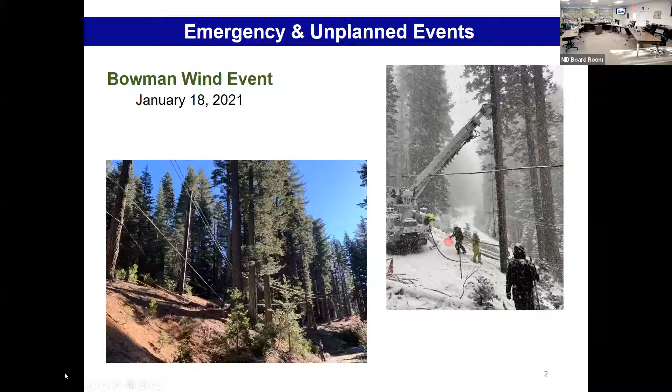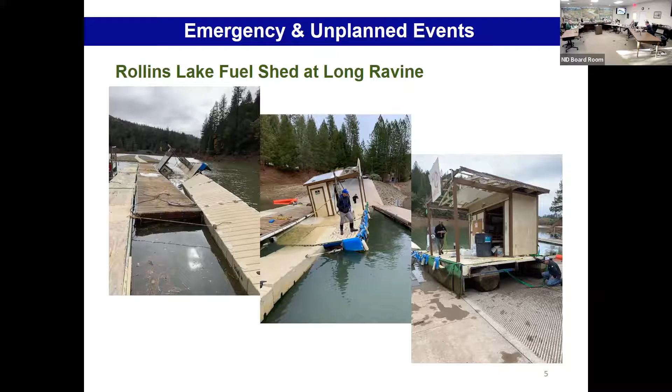The other issue we wanted to highlight, which you may have seen in the pipeline, is the aftermath of the bomb cyclone - which I still have a hard time wrapping my head around. We saw about 13 feet of rise in Rollins Reservoir. The fuel dock at Long Ravine had a problem, and the Recreation Department, Safety Department, and Hydro Department all worked together to get it onshore where repairs can be made in a timely fashion.

Moving on to the project highlights. The first one I wanted to highlight was the Combie South transformer replacement. This is the main transformer there, and it's been a bit of a problem for us. The test results have been bad for a while, and the insurance actually said they won't cover this - we need to get it taken care of. So this project was to replace the generator step-up transformer. We used an electrical consultant to specify it, the civil design was done by NID staff, and the testing, installation, and commissioning was all done by NID internal staff.

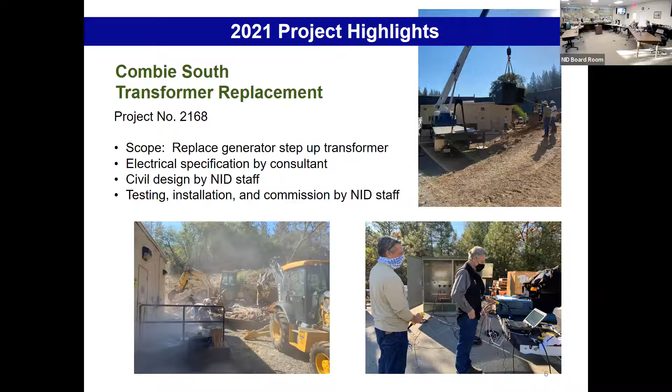The next project, in a similar vein, was a breaker replacement at Rollins Powerhouse. We replaced the existing 60,000 volt SF6 breaker with a vacuum circuit breaker. The big takeaway from this job is that SF6 is a significant greenhouse gas, so we've moved away from that and gone with vacuum breaker technology, which has no significant environmental impacts - essentially you break your arc in a vacuum instead of using a gas as an insulator. It's a significant environmental improvement. Again, we relied on an external electrical consultant for the design, NID staff did the civil design, and we did the testing, installation, and commissioning in-house.

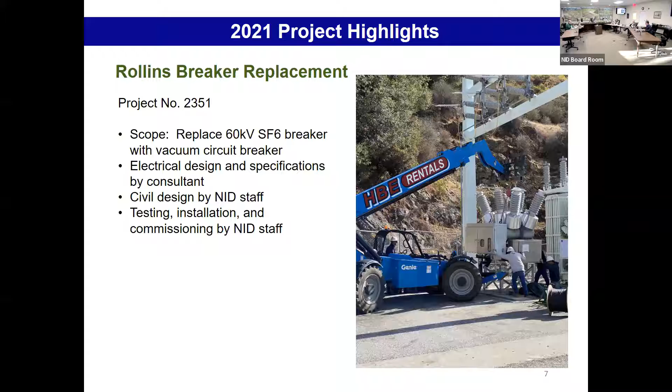Well, this is a breaker, just like a circuit breaker in our house, only large scale - except a whole lot bigger. You can see in that picture the gentleman in the hard hat standing right next to it, so it's probably 12 feet tall. It's quite a device, but it serves about the same purpose.

Just incredible maintenance issues trying to keep those free from debris, keep the water moving so the gauges were reading accurately. So we've replaced them with magnetic flow meters out there, and they're tremendously more accurate. What we found is that we don't have to run the cooling water pumps as often, which is a savings in terms of the parasitic load of the powerhouse. So we aren't pumping water to cool it down anymore now. We're just generating, and there's more electricity going to the grid. So it does overall improve the efficiency of the powerhouse with these types of upgrades.

Next project, and this is a really difficult picture to look at. We really struggled a little bit to find a picture that I could show that showed the inside of the powerhouse that didn't give away critical energy infrastructure information. So what you're looking at is kind of the side wall and the ceiling. The orange pipes there are the fire detection system. They're little PVC pipes that run to various places in the powerhouse and sniff for smoke.

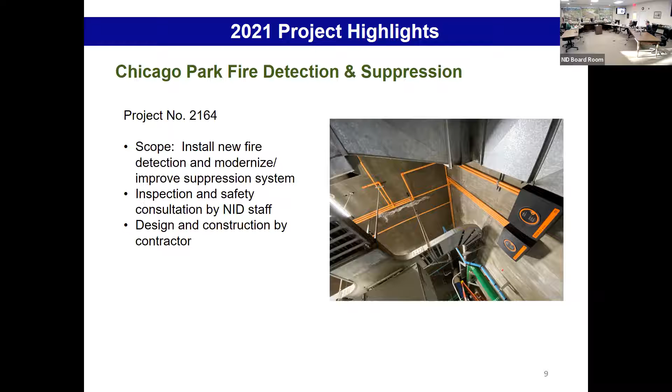And can then trip the powerhouse if there's a problem, so we detect it earlier. One of the things that we're trying to avoid here, and we've gone to great lengths to avoid, is the situation like the Thermalito Afterbay, the powerhouse there that caught fire and burned, and took many, many years to rehabilitate and put back online. It was a significant environmental problem.

Next job. Can I ask a question? Yeah. On these two projects that you have here, the last two that you've shown, are these examples where you do the work from start to finish within the hydro team?

So typically what we do is look at the skills that we have, use our staff as much as we can, and then farm out the pieces that we don't have the staff for. So we don't have an electrical engineer on staff, so if we need electrical engineering design, we'll go out and hire an electrical engineer to do that work. We don't have a mechanical engineer on staff, so we pick and choose from the mechanical engineers if we need mechanical design work. Generally, the civil engineers in the engineering department will do all of our civil design.

And then in terms of install, yeah, we generally do our install. The project here, this Texas Creek Slope Stabilization Project, is an example of a job that we did hire out to a contractor. It was too big for our crews to handle, but we find that it's more cost effective for our crews to work inside the powerhouse.

For cybersecurity reasons, if we have a contractor do it, we still have to babysit that contractor, so we have to have a body in that powerhouse anytime somebody is in there working, whether or not, or anytime a contractor is working. So we need to be more cost effective with staff inside the powerhouses. Okay, thank you.

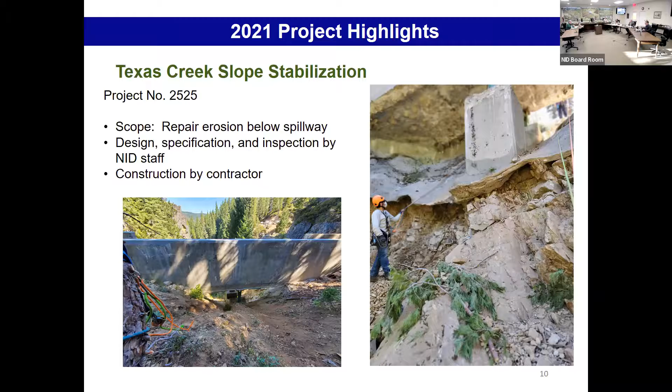We continued on our Bowman transmission line, 60 kV vegetation management. We've been really doing everything we can to hit this transmission line hard, and we're essentially treating it like the Golden Gate Bridge, where we'll go just back and forth to make sure that right of way is maintained as clear as we can keep it in the narrow window that we have.

Is this another example where hydro staff are performing the work versus the vegetation team that exists within the water area? So there's some of both that happens here, and some of this gets contracted out. Some of these areas are very difficult to access, and we find that the contractor costs are extremely high. So we bid out huge sections of this and broke it all out into individual pieces, got contractor bids in on it, and looked at it and said, no, we can do this cheaper in-house. We've looked at it, and then if the contractor can do it better, then we'll give it to the contractor.

In terms of the vegetation crew, they do all of the herbicide applications out there for us. So that work gets contracted out, and we use the resources in Grass Valley for that.

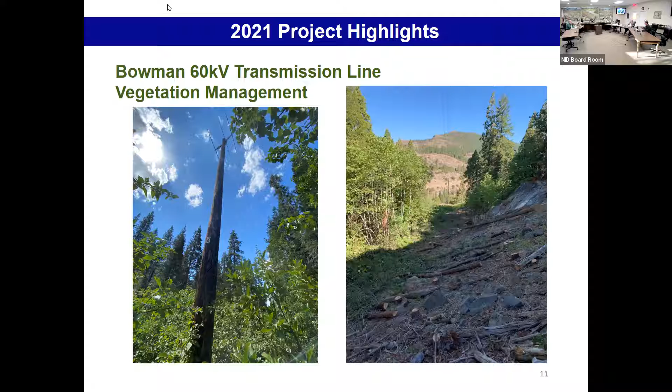The next project I wanted to hit on is the Bowman North Dam face repairs. This was, I guess, a benefit of the drought. Water levels were extremely low, so we had the ability to do some maintenance on sections of the dam.

These sections aren't normally visible above water. This worked with our safety department. You can see the little rig we lowered the gentleman on with, on the face of the dam, so he could do the work, and the safety folks helped us make sure we had all of that put together appropriately.

That concludes my project updates. I don't know if there's anything else you might be interested in. I'll run through what the other departments are doing, or the other groups on the hydro side, if that works.

Will you be touching on the technology implementation? I know last time we heard, you were in beta testing on it. And that's a perfect transition here. Okay, so, there we go.

On the admin side, that's one of the things we've been focusing on heavily, the computerized maintenance management system. We've fallen a little bit behind schedule. We're still looking at a first quarter 2022 implementation, given the recent cyber issues the district's had.

A retirement in the engineering group of one of the key GIS folks has also caused us to slow down a little, but we do expect to have this product functional in the first quarter of 2022.

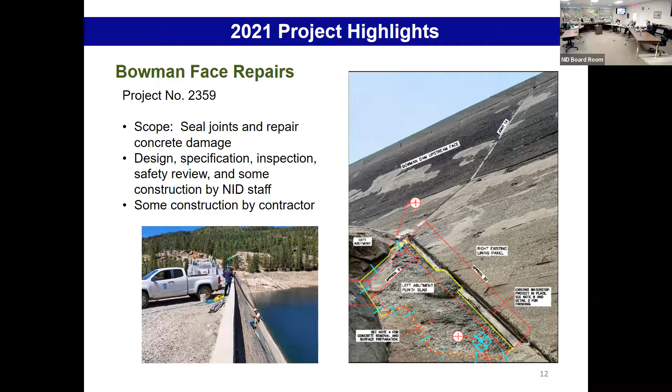When do you anticipate this particular project to be complete? On the Bowman? Yes. So the North Dam repairs, that's going to take us a couple of years of joint sealing and crack sealing. The big concrete work is done, but each joint we should probably go through, peel out all the old sealant, put new sealant in, and then patch other areas as necessary. It'll be an ongoing project over the next couple of years.

On the same subject, I'm confused—this North Dam is a rockfill dam. It has a concrete face? Correct, it's a concrete-faced rockfill dam. Oh, okay, didn't know that. Yep, most of it is just a big pile of rocks with concrete on top.

In terms of key activities, the board did approve the new power purchase agreement for the Combie South Powerhouse. The other thing we've been working through as part of our new insurance program—Zurich sent a specialist out, and they did a risk assessment and risk reduction study for the powerhouse facility. We've been working through the recommendations, and that's looking at more fire detection projects that'll come out of that over the next couple of years. That was one of the big things they were concerned with.

Moving along, as you may be aware, the board approved a contract for our 5-year Part 12D independent consultant review of the safety of dams. The inspections for that were completed in August, and then we sat down with a group from NID, the consultant, and representatives from FERC and the Division of Safety of Dams to talk through the safety of these dams. We expect the reports to be delivered early in 2022.

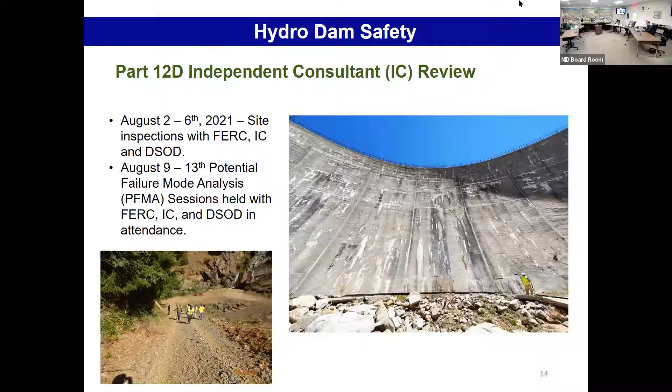We've also been working hard on the Scotts Flat spillway job. The board will get a report on this, I would assume, early 2022, with the selected alternative. You can see here the physical model that's been built for this facility, and one of the alternatives they're looking at to take care of the flows out of the dam here. We expect to deliver the report with preliminary design recommendations and costs early in 2022.

So the model's been constructed and they've done runs on it already? Yes. Did anyone go up and observe it? It hasn't been finalized yet—they've built the models, run the scenarios, and now they're fine-tuning it, and then we'll go up and take a look. I don't know that we'll physically go, depending on what COVID does and travel, but they've adapted and have a pretty good camera system where you can see different angles as the test is running. Both FERC and DSOD have seen it in the past and seem satisfied with it.

Are preliminary results favorable? Well, certainly we're going to find a solution to the problem—it'll probably be this solution here, a square-walled spillway. It essentially replaces the entirety of the lower spillway. Okay, is that what it's looking like? It's going to be the selected alternative with this rectangular-shaped channel.

This is just the lower portion—the little hatches aren't the top of the dam, that's the bottom of the current spillway, right? At the very top of the picture there are three blue lines stacked up; that's the top of the existing spillway. It drops into the plunge pool, and there's a second weir right there, which is the old spillway from the original dam. We're talking about replacing everything down from that weir.

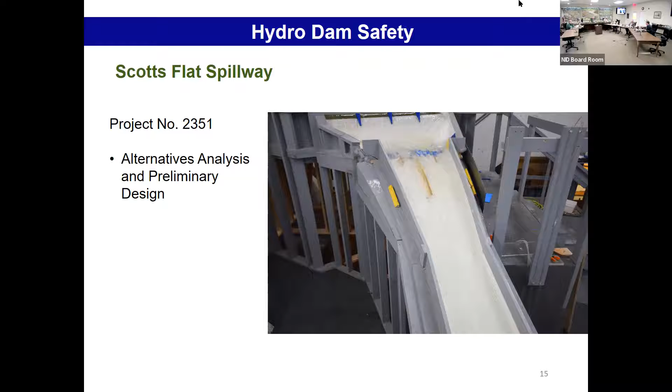The next thing we've been heavily focused on is corrosion assessment and control. We started our facility assessment with our tunnels, which hadn't been inspected in a number of years. We walked through all the tunnels, did a condition assessment, and found them in pretty good shape. We've now moved on to the steel penstocks and steel pipelines and are doing the condition assessment of these, so we can develop our capital improvement plan. Much more to come on this one.

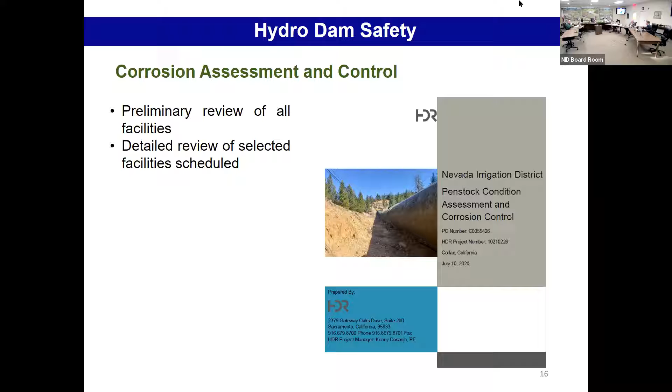We're very early on. We had hoped to do an internal inspection of the Combie South penstock in October, but the weather didn't cooperate, and that's when we got the storm, so there was no way we could take it down to do that inspection safely. We had to punt that until 2022, but we'll get to it then.

The Dam Safety Group has also been busy with the stability reevaluation of the Bowman South Arch site. This is one of the things the previous independent consultant said they wanted us to take a careful look at. The good news is it was found stable, but the consultant did have some recommended improvements to the rock mass near the thrust block.

On the hydro operations side, this is some of the reality of what the crews are dealing with. At the Combie South Powerhouse, the chart in the lower right shows an overview of energy prices at the node the powerhouse generates into. You can see prices go up at the end of the day and are low during the middle of the day. This is a reasonably recent chart, from October I think.

In the spring, energy prices actually go to near zero or even negative in some cases, then come up to around $100 an hour in the afternoon. So the operations group is tasked with ensuring we're generating during the hours that get us the most revenue, optimizing revenue with the water we have available. That's what that group has been doing a lot of recently.

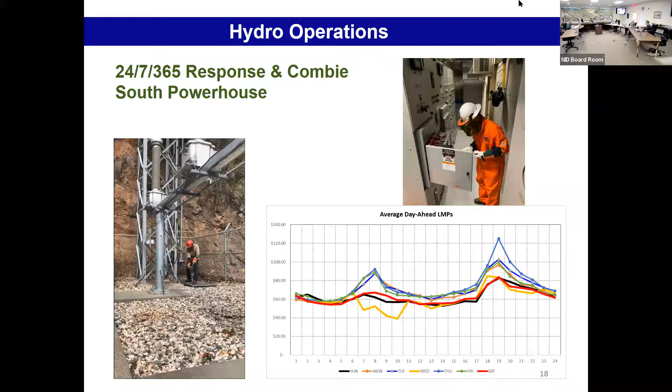What Director Peters is referring to is the CalISO market, where prices come up during the day and then drop dramatically when solar comes online, and when solar drops offline, pricing in the market goes up significantly. It's really changed the nature of the CalISO market, and that's what we're responding to and trying to optimize or maximize our revenue with.

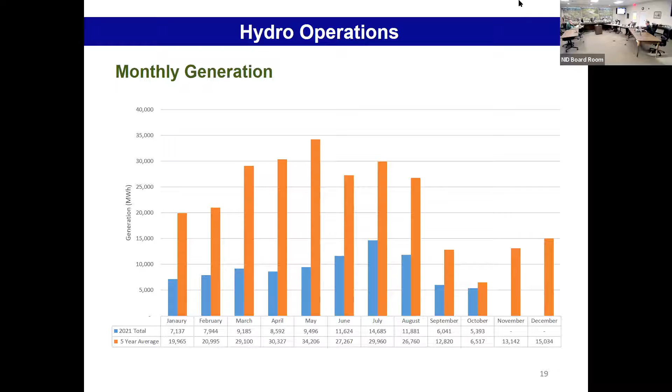I wanted to show a couple of metrics to give you an idea of how rough a year it's been from a water standpoint. This is our 5-year average generation versus our 2021 generation, and you can see the drought has impacted us dramatically across the board. The good news is that in 2011-2012, when the board negotiated the power purchase agreement for the Yuba Bear powerhouses, it was based on availability, and our availability has been fantastic this year.

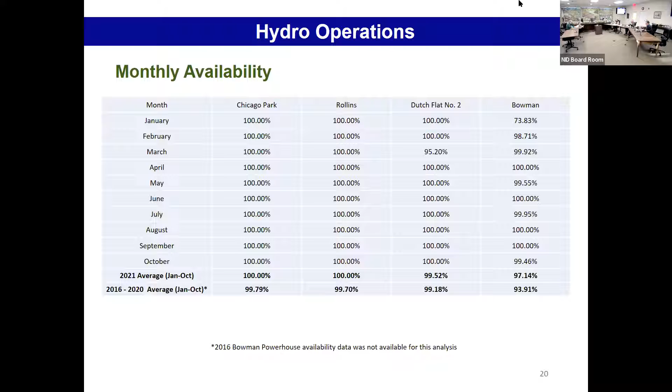So I think it's really been a fantastic year on the hydro side of the house, and that even includes that Bowman wind event in January, where you can see we had an availability that wasn't particularly good.

The next slide shows the powerhouses where the flows actually matter and the comparisons there. You can see that at Combie North and Scotts Flat, in general, our summer generation numbers were pretty good when compared to the average, and that's largely because they're driven by demand. So you can see that we did all right.

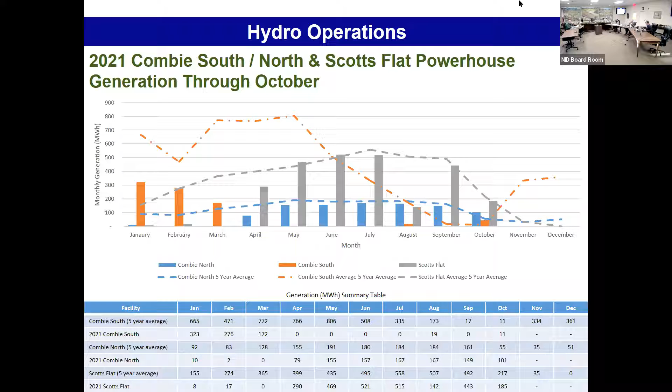Combie South is, of course, the outlier here, and Combie South being run of the river. It's just been an awful year out there. The good news is that we did have a good October with that storm that came through, and then November has ticked back up again. So hopefully we'll get some rain out of these next couple of weeks, and we'll begin to start generating there. But it's certainly been a rough year there.

Highlighting some of the maintenance side of the house and the work that they do. I've grabbed a couple of snapshots to try and give you an idea of the variety of the group work that the crews tackle out there.

The Quartz Peak Repeater project is critical to our dam safety team. Essentially what it does is takes data and repeats it to a place that we can get the elevation and flow data a whole lot easier. The tower there has been short for quite some time. In a big snow year, it gets snowed over. We'll have to fly out there and shovel out the solar panels and shovel out the antennas.

The transmission line pole replacement you're seeing there is just a routine replacement. During our inspections, we found a pole that needed to come out, and so our crews went out there and worked with a specialty line contractor to deal with that one, but we did all of the preparation work for it. Moving to the inside, you can see that this is just pictures of the routine inspections that we do inside the pipes and penstocks.

This is the turbine shutoff valve at the Dutch Flat number 2 powerhouse. We are experiencing some increased leakage there, and so I expect that the full refurbishment of that valve will show up on the capital improvement plan in the coming years.

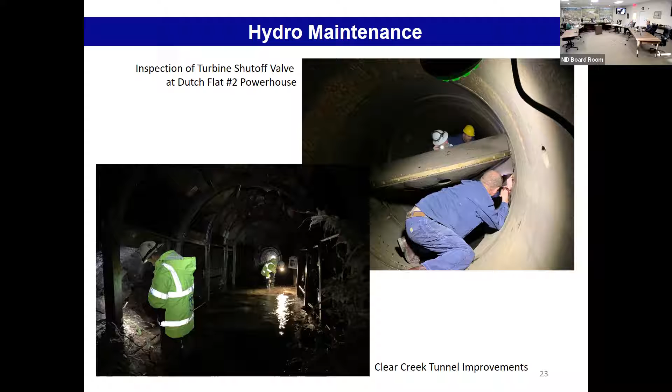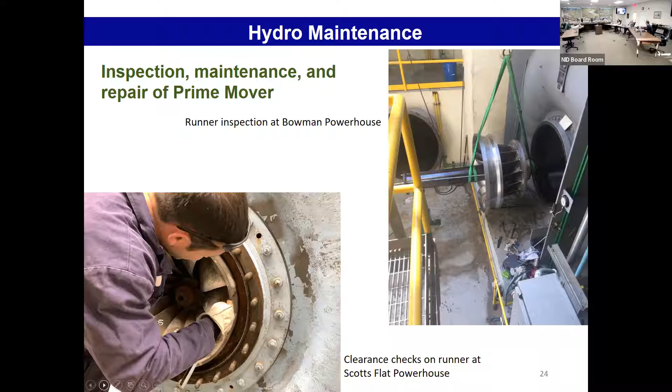This last picture here is just some maintenance on the runners. I talk a lot about runners, and nobody has a good idea of what they are necessarily. You can see the little runner, which is the circular piece at Scott's Flat. That runner, we actually had to pull it and then took it down to have it refurbished. It's a funky material, it's bronze, and it's an odd bronze compound that we can't weld on, so it has to be shop welded. The one on the right there is the runner out of the Bowman powerhouse, and that work's needed there too. We'll typically pull that one out and we can weld on it and refinish it ourselves generally.

On the compliance team, I just kind of wanted to highlight a few of the agencies that we deal with on a regular basis, and some of the work that group's doing.

The quagga zebra mussel measurement is something we partner with the recreation group to go out and do, to determine whether or not we have those mussels.

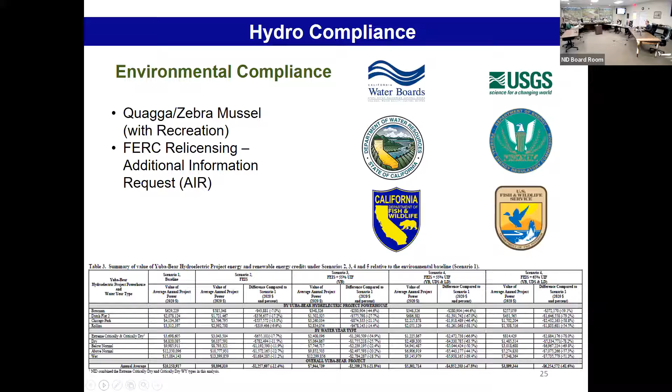And then on the FERC relicensing front, we have the additional information request, the AIR. You may have received notification that we filed a document with FERC this afternoon that responded to another round of questions about impacts of the project. So there's a lot of really good work that has gone into that over the last month or two to pull that together for FERC. So keep an eye out for that.

We also deal with a lot of NERC alerts, which is more fun to say than it is to do. Lately they've all been dealing with cold weather. NERC is very interested in not having a repeat of what happened out in Texas last year, so they're very focused on cold weather impacts to generation. We're not particularly worried about it, we're fairly used to dealing with temperatures like that. And then, of course, just the regular maintenance and reporting.

The hydro compliance group is kind of the other duties as assigned, all-of-the-above sort of group. If something comes in and needs to get dealt with, it's those folks that deal with it. That's everything from hazardous material disposal to emergency action plans to FCC licensing, and any of the myriad of things we deal with on that side of the house.

Looking ahead to 2022, the South Yuba Canal and Deer Creek Powerhouse - we'll talk about that briefly in the next two slides, so I'm going to skip it for now.

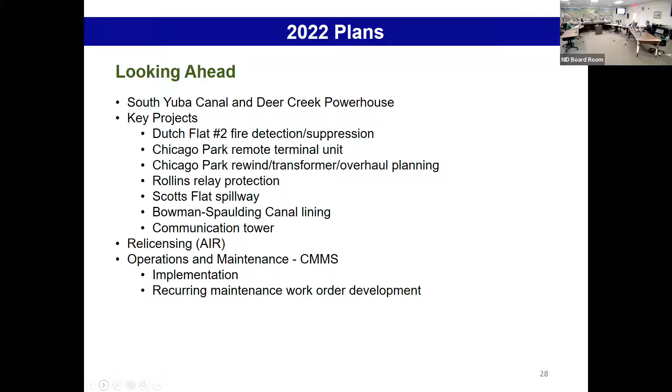And now, Deer Creek. First of all, I wanted to give a quick high-level review of the Deer Creek and South Yuba Canal purchase. On November 14th, the board approved the purchase of the Deer Creek development, which is portions of the South Yuba Canal. You also approved purchase of a bunch of lands, tangible personal property - all of the gauging stations, the alarms, anything that's inside the powerhouse. There are some water rights, the pending FERC license, the easements encumbering any land that PG&E is going to retain, and that approval also approves the lease agreement.

On April 28th of this year, the board adopted Resolution 2112, which reaffirmed your commitment to this acquisition. At that time we didn't know when it was going to happen, but on November 18th, it happened - FERC issued the order approving the partial transfer of the license, and that's a lot of words to say essentially everything that PG&E and NID asked for were approved.

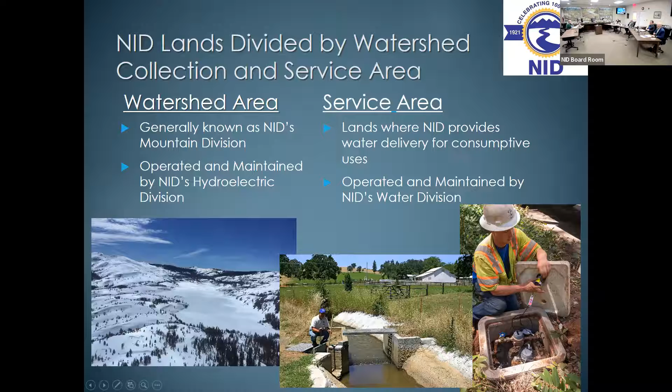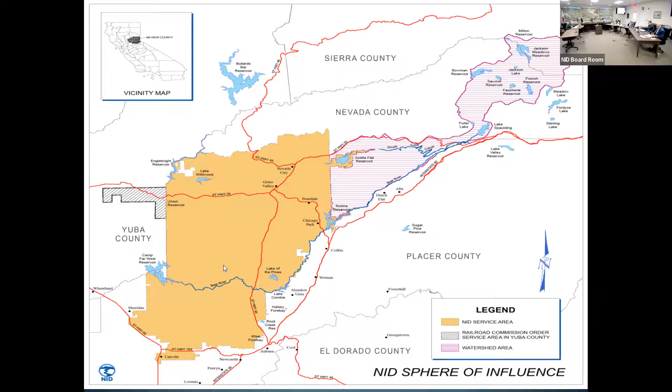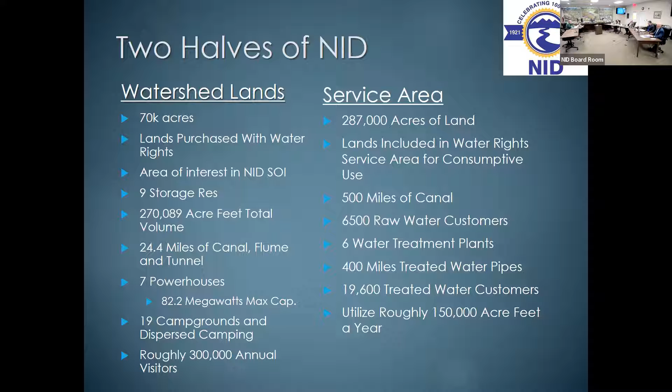For those who participated last time, we started at the headwaters of the Middle Yuba River system at English Meadows. We discussed that it was rather odd that NID is there because there's no reservoir. But back in the late 1800s, there was a reservoir there, English Reservoir, that was destroyed. When NID came along in 1921, although there was no reservoir, there were still water rights and land available there. NID purchased both, and we continue to utilize the land, turning the area into English Meadows, and we are actively working on restoration of that meadow for environmental and water quality purposes.

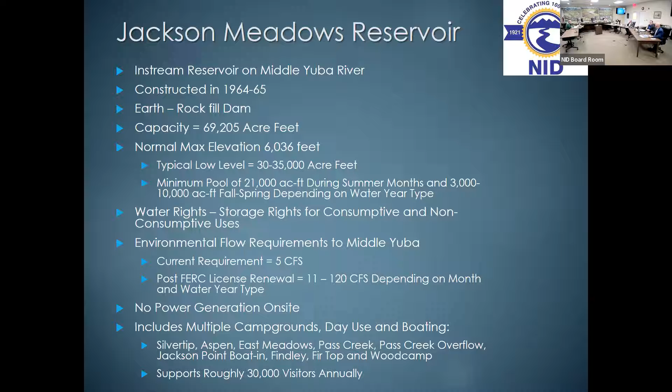We talked a little about in-stream flow requirements out of this facility, but this is a good time to discuss the different types of in-stream flow that NID is required to do through current regulation and coming future regulation. This particular facility has an in-stream flow requirement to pass water into the Middle Yuba River at all times of 5 CFS. Generally speaking, there are two different types of in-stream flow releases. This one is a release where we get to reutilize these flows.

Basically, we're going to put that 5 CFS back into the Middle Yuba River, and then we'll recapture it at the next reservoir down below, which is the Milton Diversion Facility. There are other locations we'll discuss where we have an in-stream flow requirement that we put in the creek, but it's non-recoverable to NID. In other words, it goes outside our district and we can't recapture those flows. We'll discuss those as we come across them.

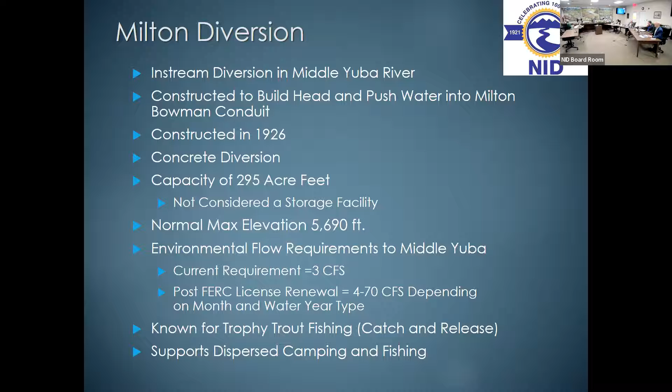So in that instance, is all of the water either going into the Milton Bowman Conduit or that FERC release, or is there additional water that may go into the river with the FERC water or environmental water? I apologize if I don't use the correct terminology, but I'm wondering - is it all going into the Milton Bowman Conduit minus the FERC flow, or is there additional typical water? I'm sure it varies. It's a little bit of all of that, you're right.

I imagine that scenario exists in a lot of the facilities - you have the overflow during the high water season, and then you've got the mandatory releases controlled for the rest of the year. Yes. Okay.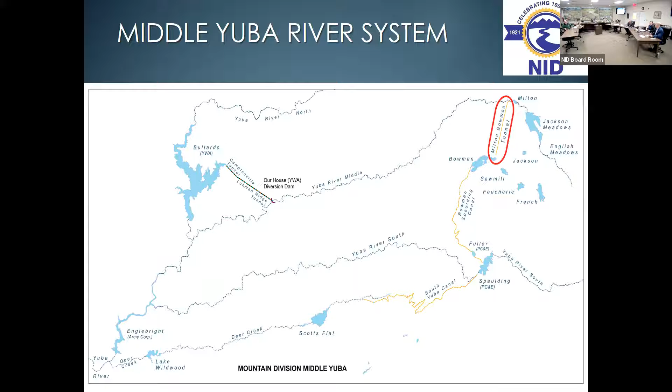One other thing I'd like to add is that wherever we have a diversion point that pulls water from a natural waterway, we're required by the state to measure those flows and report them. We won't go into great detail here, but future workshops will describe how we measure these flows, how we transport that data, and how we communicate it back to the state. Essentially, wherever we divert from a natural waterway, we are required to measure these flows at all times.

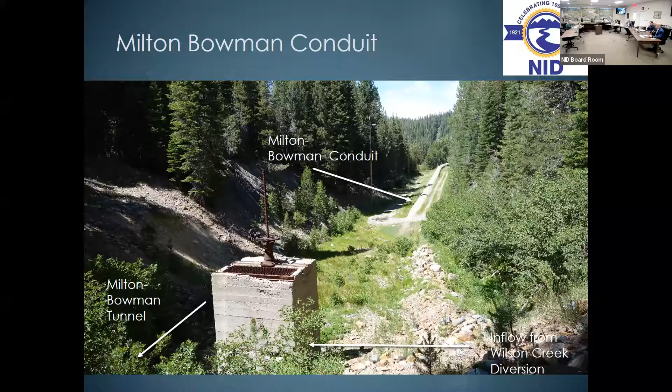In this picture you can see the pipeline coming down the hill. Moving to the bottom left side, it disappears into the tunnel. On the bottom right, you can see inflows from Wilson Creek. We have a natural diversion of Wilson Creek where we have the water rights to capture those flows and put them into this conduit, sending them to Bowman. As mentioned, these flows are subject to curtailment, so we turn that on and off as needed.

Do we divert the entire creek? Yes, we'll move into Wilson Creek in the next section. Here's a picture of the Wilson Creek diversion. It's pretty low tech. Currently we're working on a more permanent and robust facility that allows better control. Under the current FERC license there's no in-stream flow requirement, but after the new FERC license, we'll be required to provide 0.25 CFS or the natural flow in the creek, whichever is less.

I included pictures of this typical gauging station where we measure flows within the creek. You can see that little building on the right-hand side. There's no power out here, and it's very remote—in the wintertime we usually can't even get here. So we rely heavily on solar power, batteries, and technology to give us this information in real time. It can become a challenge, but that's one of the ways we navigate it.

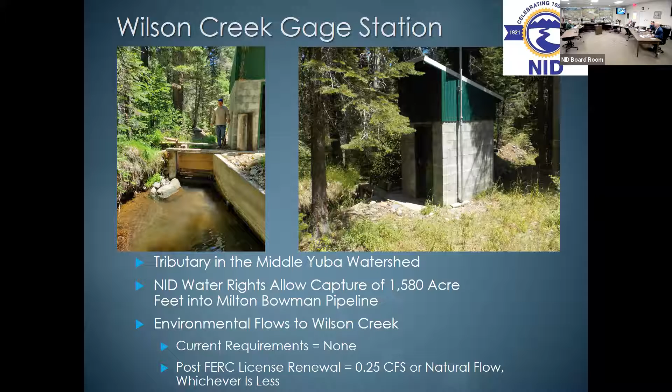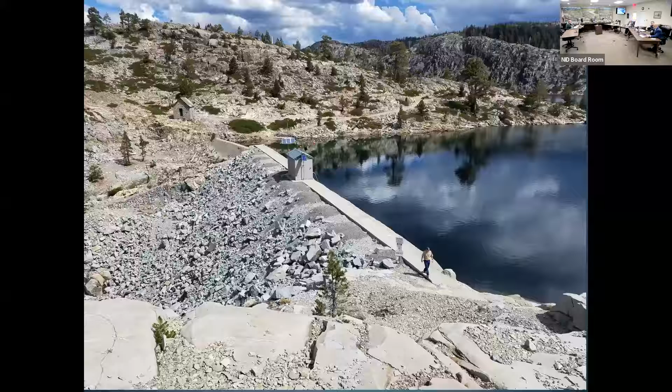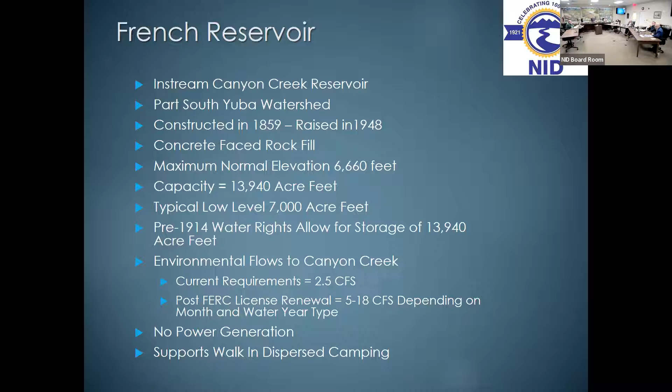French Reservoir is an in-stream Canyon Creek reservoir, meaning the dam itself is built within the creek and backs up water within the channel. It's part of the South Yuba watershed, constructed in 1859 and raised in 1948. It is concrete-faced rock fill, with a maximum normal elevation of 6,660 feet and a capacity of 13,940 acre feet. The typical low elevation is around 7,000 acre feet, so we utilize about half its capacity every year. We have pre-1914 water rights allowing maximum storage at the facility, and its current in-stream flow requirement is 2.5 CFS. Post-FERC license, that changes to between 5 and 18 CFS, depending on water year type or time of year. There's no power generation at this facility.

It is very remote, but it does support some recreational use. People either have very robust four-wheel drives to get in there, or they hike in and camp—actually, it's hike in only. In the picture of the facility, on top of the dam, you can see one of our reporting stations, again using solar panels, cellular signals, and radio towers. It's how we get information in and out, since it's very remote.

From there, we put flows down into Canyon Creek, and they flow into Faucherie.

Another pretty location. This is an in-stream Canyon Creek Reservoir, part of the South Yuba watershed, constructed in 1872 and then rebuilt in 1964 and 65. It's an earth core rock fill facility.

Maximum normal elevation is 6,123 feet. It has a capacity of 3,980 acre feet. Typical low elevation is 2,200 acre feet. We do have pre-1914 rights for storage of up to 2,600 acre feet.

The balance of the storage is available in post-1914 rights. Current flow requirements are 2.5 CFS into Canyon Creek. Post-FERC requirements are 5 to 18 CFS, and those flows are recoverable at the next downstream reservoir, which will be Sawmill. This facility supports camping, day use, and boating, with roughly 7,000 visitors annually.

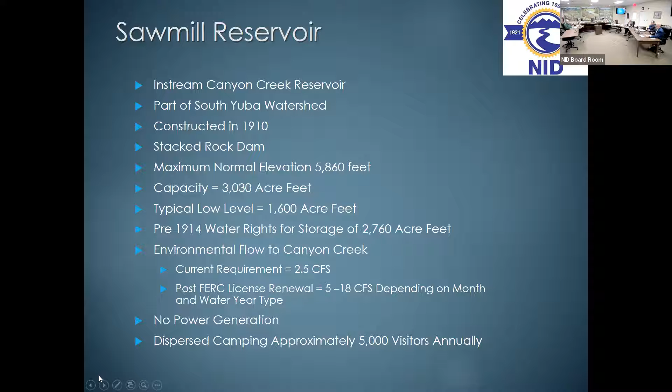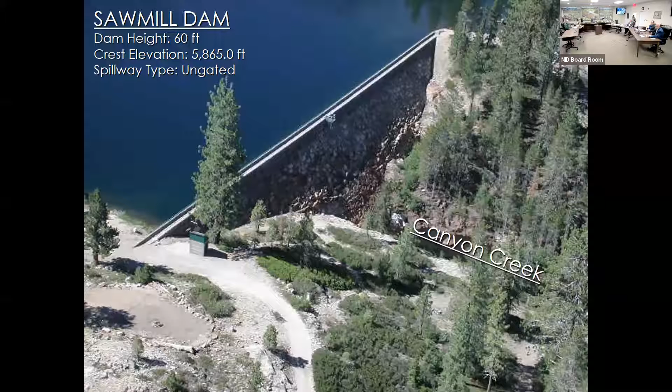That completes the supply from Canyon Creek, and we're going to move up into Jackson Creek, a fairly small watershed. At the head of that watershed is the Jackson Reservoir.

It's a fairly small reservoir, an in-stream reservoir, part of the Jackson Creek watershed, constructed in 1941 and 42. It is an earthen dam at an elevation of 6,592 feet, with a capacity of 1,330 acre feet. Typical low elevation is 900 acre feet, and we have water rights for 1,330, essentially the full allotment for storage.

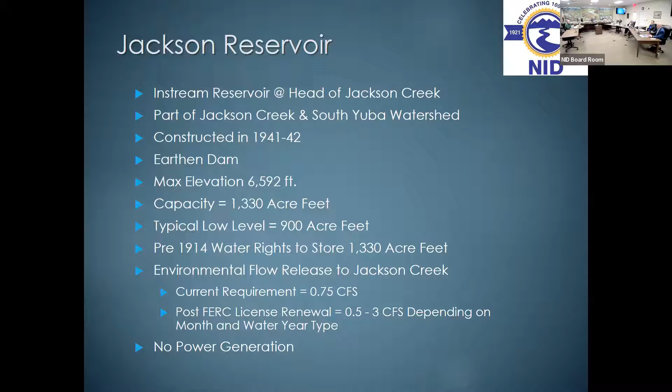We have an environmental in-stream flow release of 0.75 CFS, which will change after the FERC license to 0.5 to 3 CFS, depending on month and water year type. Again, this is one facility where those in-stream flows go back into Jackson Creek and eventually make their way into Bowman Reservoir.

Chip, I have a question. So you've been presenting how the environmental flow requirements are identified by body of water. Are those flows cumulative as one reservoir feeds into another? Say there's 2 CFS required, and 2 and 2, and then there's 10 CFS required at the next reservoir—is that 10 plus 6? No, it's not cumulative. For example, let's walk through Canyon Creek here if I can.

Which then flows into Bowman. Bowman actually has an in-stream flow release requirement into Canyon Creek that is non-recoverable to the district, and that's going to be 6 to 40 CFS in the future. So you can see it kind of matches as you go down Canyon Creek, but once you get to the end of that facility, you have Bowman dumping out into Canyon Creek at the lower reaches between 4 to 60 CFS, and that volume is lost to the district.

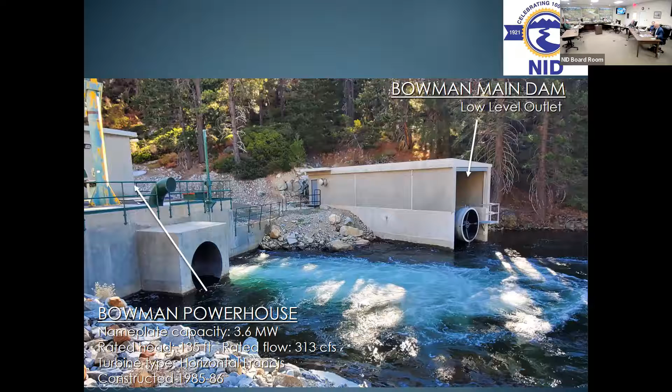Here's a picture of the outlet of the Bowman Powerhouse on the left. On the right is the low-level outlet for the Bowman facility, the Bowman Dam.

As I mentioned earlier, there's an after bay right below the powerhouse where we back water up again, and the specific purpose for that is to push water into the Bowman Spaulding Canal. This is a nice long facility, so I just highlighted it in yellow for you. Essentially, its main purpose is to transfer Bowman water down into Lake Spaulding.

This facility is located within the South Yuba watershed. And again, before I get too far, here is a picture of that facility, at the bottom of your screen. You can see the Bowman Powerhouse, and you can see the after bay where we're backing water up. And then off to the left-hand side here, that's where the canal takes off. That's also where we do our regulation and flow control, and where we dump water back into Canyon Creek for in-stream flow.

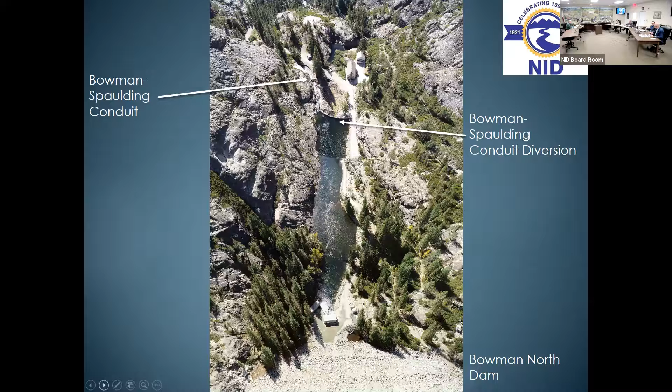The facility itself was constructed in 1926 and expanded in 1964-65, in coordination with the Yuba Bear Hydro project's increased capacities. It involves 7.7 miles of canal and flume and 3.1 miles of tunnel, and can convey 300 to 325 CFS depending on the location within the facility. We typically hit pretty close to that, nearly 290 CFS, so we're nearly at max capacity of this facility.

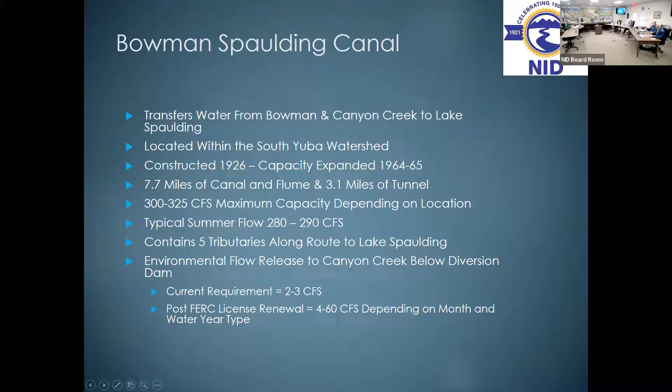The other unique thing about the Bowman-Spaulding Canal is it crosses over 5 different tributaries that cross into or under or over the canal, and we have water rights along those tributaries. We also have an in-stream flow release requirement at this diversion facility that flows water into Canyon Creek. It's currently 2 to 3 CFS, and in the future it will be 4 to 60 CFS. There's the diversion facility itself.

Following that yellow line down, the first tributary you run into is Texas Creek. The unique thing about this, I circled it all in red, but essentially the headwaters of Texas Creek have a number of lakes: Rock Lake, Bullpen Lake, and Lindsey Lake. You can see underneath their labels, they're all PG&E facilities, so PG&E is actively operating these with their own water rights. They're pushing those flows down into Texas Creek, which flows into the BS Canal, and we convey those flows for them and with them, in conjunction with them.

We do all this through a coordinated operating agreement, and there are many facilities that we share. The coordinating operating agreement basically spells out how we share waters in these areas, who takes priority, and it also talks about the coordination. We essentially call and talk with PG&E on a weekly basis to coordinate all of this movement through the system.

Do they contribute financially for the upkeep of the canal as well? Is that part of the coordinating agreement? That is not part of the agreement. Because we have shared facilities, they have some incurred costs to move our water, and therefore we also have some incurred costs to move their water. In this particular location, all these tributaries, we have shared water rights. So the first roughly 3,500 acre feet of water rights is PG&E's. We use that, we track that for them, and send it into the system. The balance is then NID's.

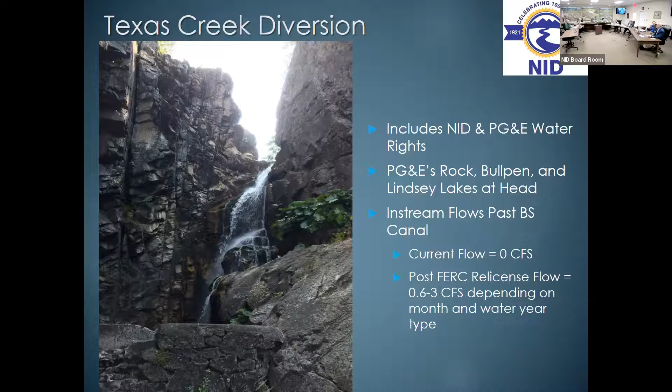So this particular facility is a very beautiful facility. It's a big old giant waterfall that flows into the canal itself. Very remote, hard to find though. This particular facility did not have an in-stream flow requirement, but post-FERC license it will, at 0.6 to 3 CFS depending on the month and water year type. This is one of those facilities where it is a non-recoverable in-stream flow release.

It's amazing anyone ever conceptualized this whole thing, is all I've got to say. I was going to say, reading the history about the coordinated agreement goes clear back to the formation of the district. It's fascinating, the nuances, and I've asked the same question. Okay, they get this, they get that water, we get this water, and they make this power. It's quite a complex deal. A lot of it came from the Excelsior Mine Company, which then became PG&E, and we split all those facilities up. It's pretty crazy. It is crazy.

Moving on down the Bowman-Spaulding Canal, the next tributary you cross is Clear Creek. The Clear Creek diversion is shown here in this picture. It's a fairly small watershed with no reservoirs above it, but regardless, we have water rights to capture some of those flows. You can see the long concrete structure right next to our BS canal there, and the little opening in it where water's flowing across.

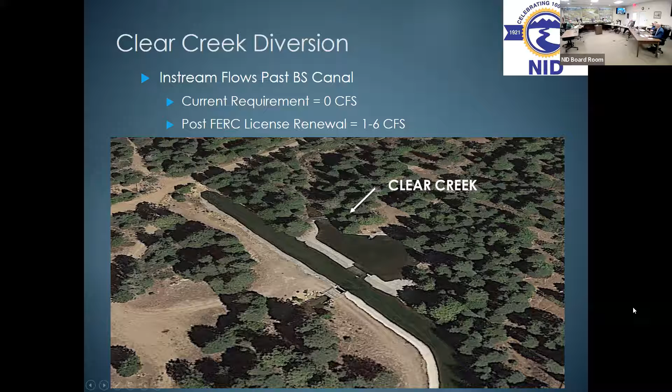And certainly the ones with reservoirs above it do. These do have active water rights, and we'll get into discussions in the water rights workshop. Each one of these tributaries comes with its own set of water rights.

Moving down into the next tributary, we have Fall Creek, and this is one of those facilities that does have PG&E reservoirs up above it in Feeley and Carr Lakes. This particular diversion facility is a little bit more robust than those other ones we've talked about. It currently has a 0 in-stream flow requirement, but post-FERC license it will have 2 to 30 CFS or natural flow, whichever is less. This is one of those locations where it's also lost to NID.

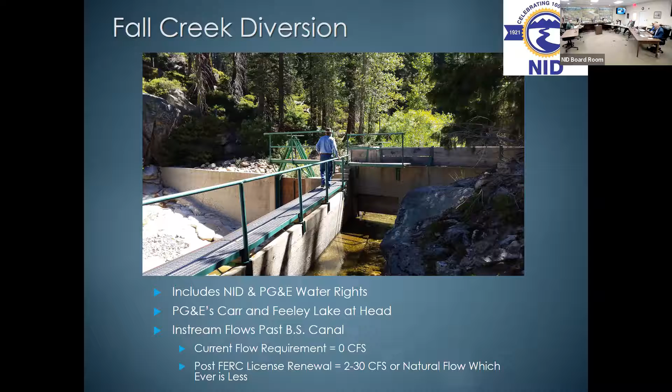This next slide gives you an overview of the facility itself. You can see our Bowman Spalding Canal, and Fall Creek is actually traveling underneath it. Up here on the right-hand side is the actual Fall Creek diversion dam, where we take the natural flow and put it into this elevated flume section and then combine it into the BS canal.

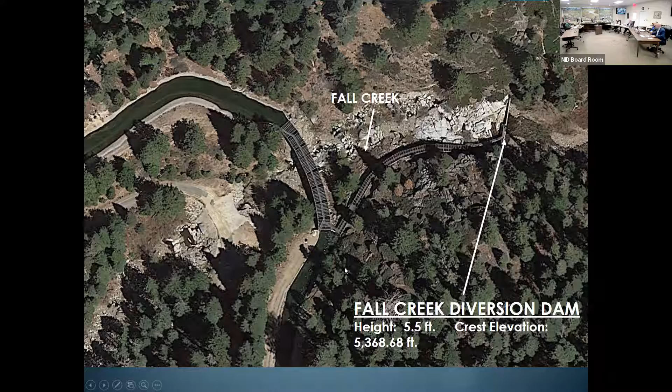Kind of cool, but also interesting, is this slide showing the myriad of materials we work with up there. The Bowman Spalding Canal you see in the background is all steel and galvanized - it's one of the more robust crossings we have up there, actually. Most of them don't really look like that. But the Fall Creek diversion, as you can see closest to you here, is all wood. So we have quite the myriad of different materials and facilities that we work with out there.

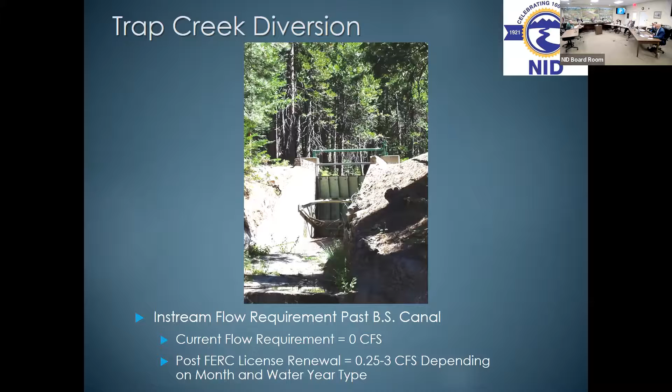Moving on down the system, we have Trap Creek as the next tributary. This has a very small watershed, not a very large diversion location at all. No current in-stream FERC requirement, but post-FERC license renewal it will have 0.25 to 3 CFS, depending on the month and water year type. Here's a picture showing the right-hand side is where it comes in, and if we have to release additional in-stream flow, it'll go out this side here.

Moving on down into the last tributary into the Bowman Spaulding Canal, we have Rucker Creek. Rucker Creek again has a couple of PG&E facilities above it - the headwaters are Blue Lake, a PG&E facility, and then Rucker Lake. The current in-stream flow requirement is 0. The post-FERC license requirement is 0.3 to 3 CFS.

So Fuller Lake is a PG&E facility. It is a reservoir on the BS Canal system. It passes NID water into Lake Spalding as well as PG&E waters. It has a capacity of 1,150 acre feet, and this picture of the dam is included because the reservoir and the dam are PG&E's responsibility. However, at the top of the dam you can see the continuation of the BS Canal. Because that canal is an NID facility, NID or PG&E tells us that is our section to maintain.

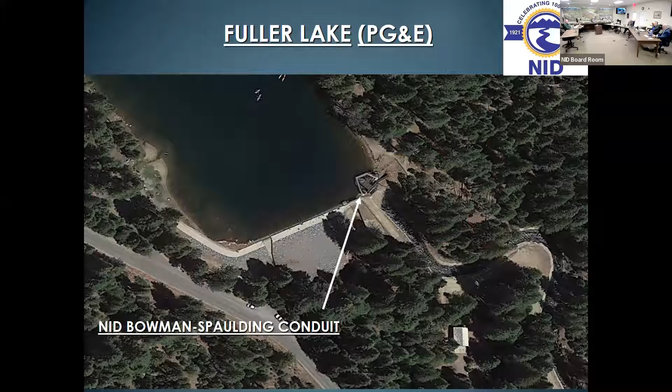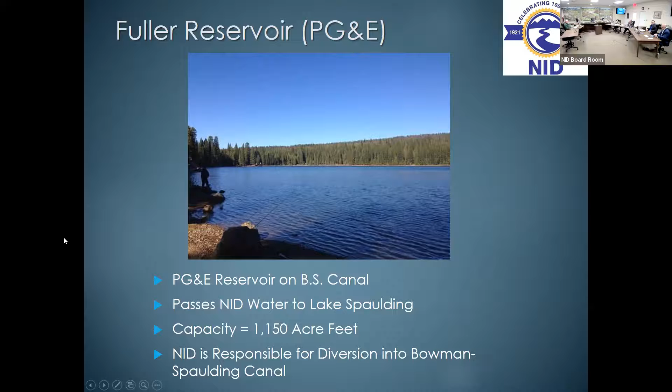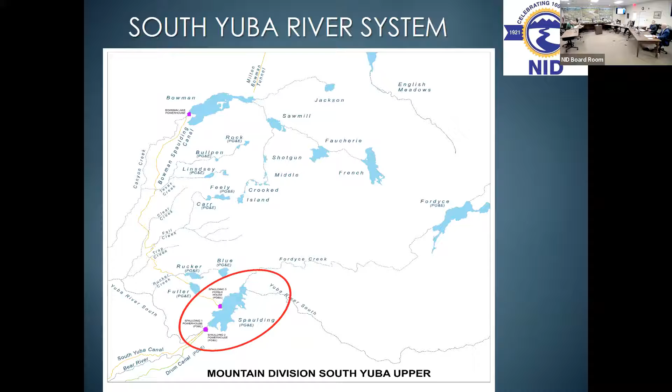So again, we're still at Fuller Reservoir, and as mentioned, the whole point of Fuller is to serve as a bit of a gauge and regulating reservoir as we continue down the BS Canal and feed water into PG&E's Spalding Lake. As mentioned before, in the Bowman Spalding Canal it's a mix of NID and PG&E water. As that water flows into Spalding, it runs through a powerhouse — specifically Spalding number 3 — where PG&E generates those flows.

There it is, Lake Spalding. That is a PG&E facility — an in-stream reservoir on the South Yuba River, owned and operated by PG&E as a concrete dam. Maximum capacity of 74,773 acre feet. Their typical low level for operations is about 20,000 acre feet in the winter months, the beginning of winter, I should say.

Again, it includes multiple powerhouses. We just discussed that Spalding number 3 is where the BS Canal comes in. However, Spalding 1 and 2 are able to generate power as water leaves Lake Spalding and goes into either the South Yuba Canal or the Drum Canal.

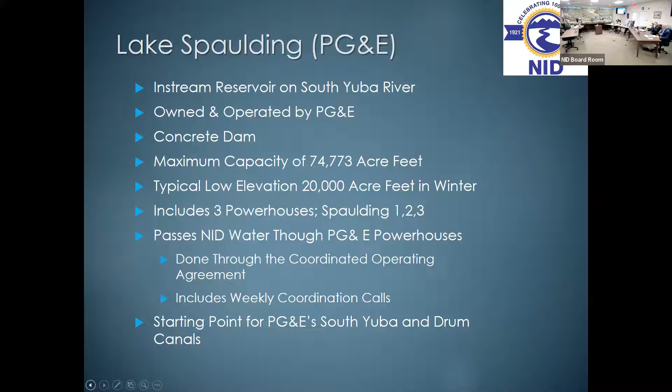We talked about the coordinated operating agreement, and then we'll talk about where these flows go out of Spalding.

Spalding is in a unique area, at a split of a bunch of different facilities. So we have the ability to take the water that's in Spalding, both NID and PG&E water. It can flow either naturally into the Yuba River and continue down the South Yuba River, as shown at the top part of the map here, or it can go through the powerhouse and flow down the South Yuba Canal, shown here in yellow.

Or it can go through the powerhouse and down the Drum Canal, shown in green here. Or it can go into either one of those canals and then dump into the Bear River. So a multitude of options from this one particular location. For now, we're going to focus on the first section, the South Yuba Canal and the Deer Creek watershed.

Question: so all of these facilities were constructed back in the 1800s for mining, or are they all modern canals and conveyances? It's a mix, a big huge mix. Some of this was built and rebuilt during the Yuba Bear Hydroelectric generation project in the 60s. Many facilities existed but were torn down and upgraded to facilitate higher flows and support hydroelectric generation. On PG&E's side, their stuff is generally very senior, very old. But again, it's a mix.

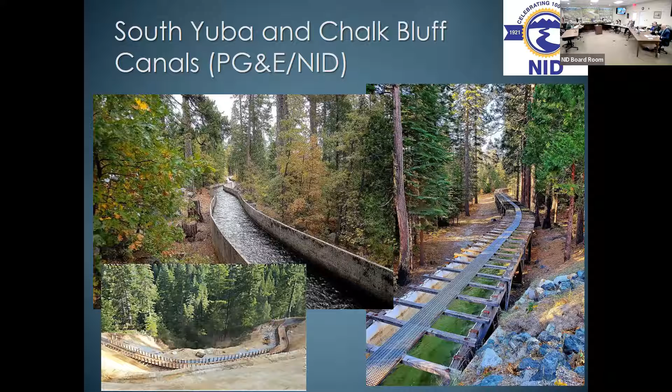The South Yuba and Chalk Bluff canals - we talked about that a little earlier in the hydroelectric department update. Essentially, its main purpose is to transfer NID water from Lake Spaulding to the Deer Creek watershed. It's currently owned and operated by PG&E, kind of, as you heard. We do have a purchase and sale agreement we're working through, and as Kian mentioned, we did get FERC approval, so it is moving along.

The hydraulic design capacity at the head of the canal is about 107 CFS roughly. But as you move through the system and down towards the end of the canal, it reduces down to about 85 CFS.

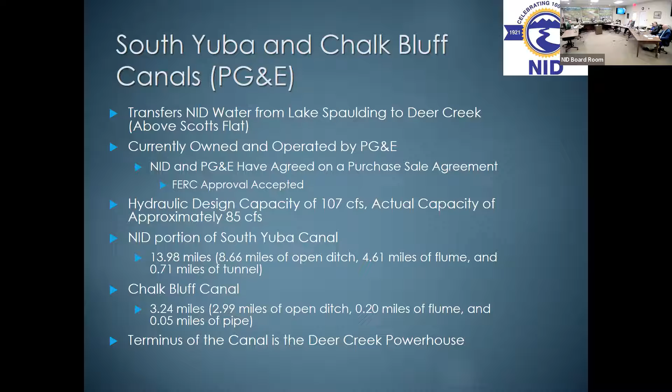You can see in this note it says NID's portion of the South Yuba Canal. Although we're purchasing this facility, we're not purchasing it all the way up to Spaulding. There's a short piped section that is PG&E owned, and they're going to maintain ownership of that. Of the remaining canal, NID's portion is 13.98 miles: 8.6 of it is open ditch, 4.6 is flume, and 0.71 miles of tunnel. Once you make it through the tunnel, the canal changes name to the Chalk Bluff Canal, which includes 3.2 miles - 2.9 open ditch, 0.2 flume, and 0.05 pipe.

The terminus of this facility is the Deer Creek Powerhouse, which has been there since 1906. Capacity is 6.9 megawatts, although I'm told it doesn't generally run that high - it runs somewhere in the 5.7 range.

Is the Chalk Bluff Canal our canal? It will be, yes. Okay, that's part of the South Yuba deal. Yes.

Jeff, we have a quick question: how much water is annually conveyed now in the South Yuba Canal and the Chalk Bluff Canal? Well, it varies from year to year based on hydrology. The flow rates - I don't have an exact figure.

In the summer months, we get pretty close to maximizing the facility, up in the high 70 CFS flow range. In the winter months, things ramp down quite a bit for a multitude of reasons. One is you don't need the flows for consumptive uses anymore, but two is PG&E generally runs the facility much lower due to winter operations and concerns with weather and storm events. That reduces flows down to around the 30 CFS range. The total annual figure we can talk about at a later date - I don't have that off the top of my head, but those are the flow ranges we see.

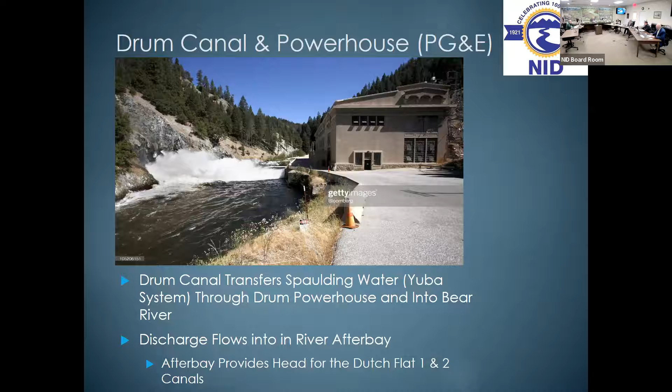That water is put into that canal and conveyed down into the Drum Powerhouse. And here's a picture of the Drum Powerhouse. That powerhouse is pushing that water down back into the Bear River. Just below this facility is another after-bay facility that backs water up in the Bear River and allows us to put those waters into the Dutch Flat conduit.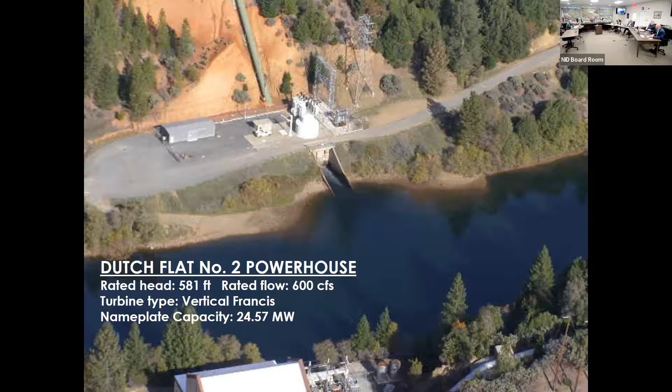NID's Dutch Flat number 2 is an off-stream Bear River powerhouse constructed in 1964-65, rated at 24.57 megawatts. Power is generated, again, via consumptive demand and run-of-river, so there are excess flows in the Bear River. We're able to capture some of that and put it back through the powerhouse. We do have a power purchase agreement with PG&E through June of 2033. And again, it does discharge into the Dutch Flat after bay, which you can see in the next slide.

There is a quick question I want to acknowledge from Ms. Suarez: when will NID initiate the new minimum in-stream flows in the Bear River, since there is a commitment to water stewardship? I think we're all working towards it. I don't know that we have figured out all the nuances of how it impacts our ability to generate power. We have been trying to comply early with the ramping requirements. We have had some struggles, but we are still trying to juggle a number of things to get ourselves sorted out. Do you have anything more to add?

I would say that this Plan for Water process we're going through is going to help guide us in how much water we have for the future, and how the in-stream flows affect our operations. It will help us determine whether we should turn those on immediately because we're unaffected, or reanalyze due to detrimental effects. I'm not saying we can renegotiate any of this, nor that we would want to. This process gives us a more holistic picture of where NID's supply and demand stands.

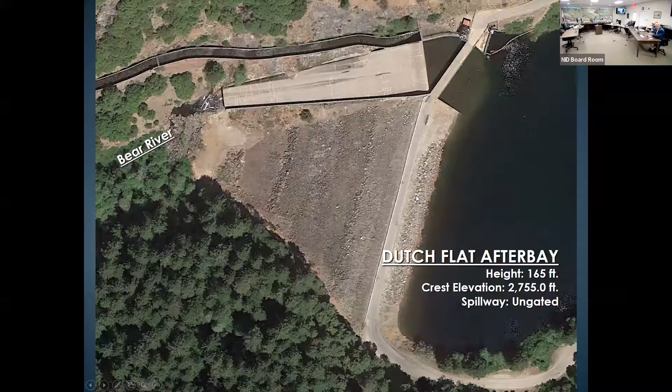Did NID construct it, or was this all PG&E? No, this is actually part of the Yuba Bear project, and it was NID construction. Okay, the Chicago Park conduit too? Yeah, and same with the Dutch Flat Afterbay.

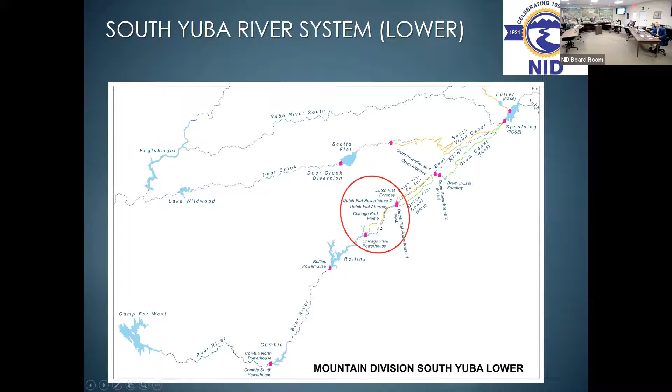Moving on, this map shows where the Dutch Flat Afterbay is, and where we capture that water in the Chicago Park conduit and push it into the Chicago Park powerhouse. Here's another view of where the Chicago Park conduit takes off. It's a 7.2 mile concrete flume and gunite lined ditch, with a capacity of 1,100 CFS, constructed in 1964-65.

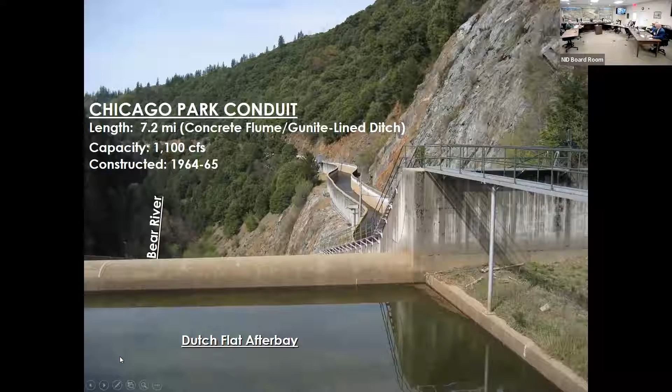This picture always impresses me. We use gravity, so you have to follow the contours. It's amazing to see the kind of construction they did to make that happen. So it really wasn't just a drunk construction crew, they actually did this on purpose, and it's rather impressive. That's a massive amount of water, too. Yes, very high volume.

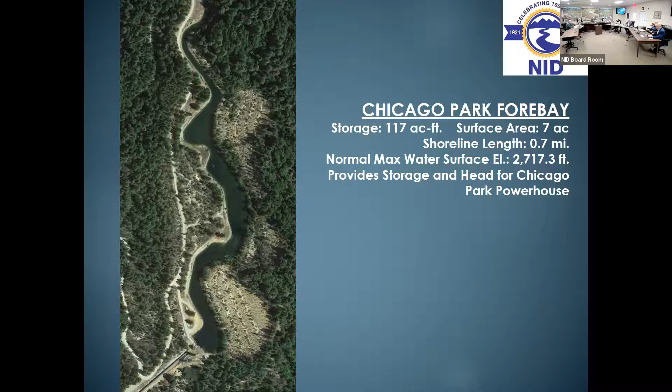And that takes us down to the Rollins Reservoir. Can I ask a quick question? That 1,100 CFS really struck me, because that's the amount in the South Fork of the American River, and I kayak, a lot of water. Yes. But then I wanted to look back at how much water is conveyed into Scotts Flat Reservoir.

So is that Rollins Reservoir, or Scotts Flat? I'm looking at the two watersheds, and what's the relative amount of water going into Scotts Flat versus going through Rollins?

Great question. Keep in mind, the Deer Creek watershed and the amount of water being pushed down the South Yuba Canal is fairly small compared to what's moving through the Bear River system. In peak summer months, it's 70 to 75 CFS on the Deer Creek side, generally speaking. On the Bear River side, that number is much bigger, somewhere in the neighborhood of 600 to 700 CFS.

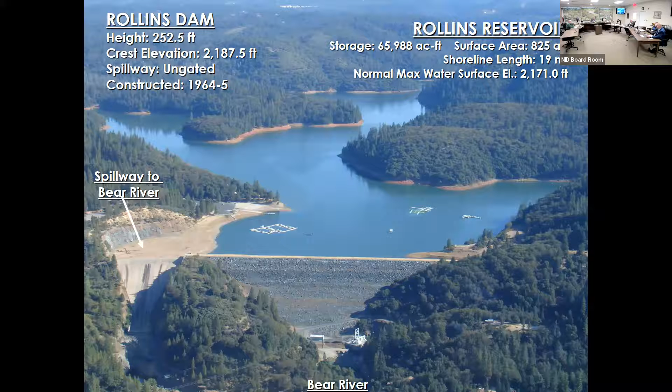Moving into Rollins Reservoir—obviously a very popular facility around here, with lots of recreation. It's an in-stream Bear River reservoir, constructed in 1964-65, an earthen rockfill dam with a maximum capacity of 65,988 acre feet. Typical low elevation is 40,000 acre feet, targeted because we can generally keep the boat ramps in at that elevation. It has water rights that include both consumptive and non-consumptive uses.

It also has an environmental flow requirement to the Bear River. The current requirement is 15 to 75 CFS, depending on season and water year type. Post-FERC license, that changes—it goes from 15 to 125 CFS, depending on the month and water year type. This is a recoverable in-stream flow because we can capture it at Combie and utilize it depending on the time of year.

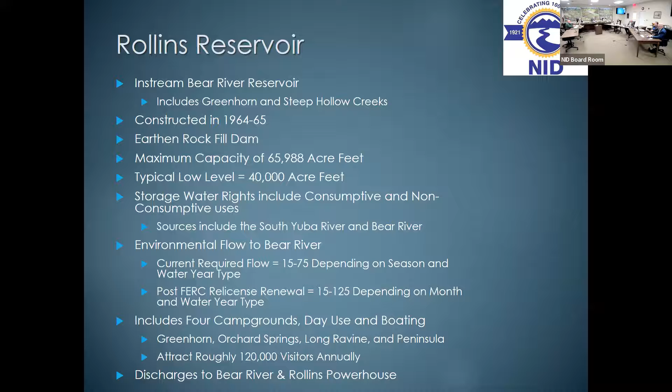It's a very popular recreation facility with four different campgrounds: Greenhorn, Orchard Springs, Long Ravine, and Peninsula, attracting a staggering 120,000 visitors per year. This facility discharges and acts as the head pressure for the Rollins Powerhouse, an in-stream Bear River powerhouse constructed in 1979-80, rated at 12.15 megawatts.

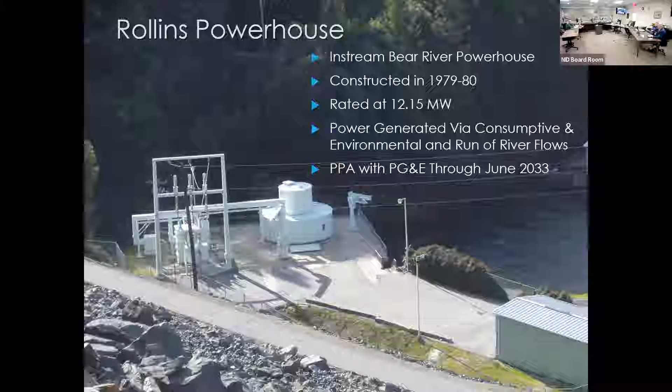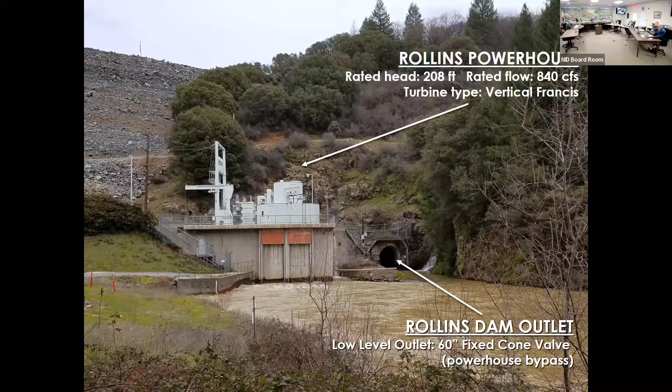Here's a picture of the Rollins Powerhouse at the base. The powerhouse itself is on the left. You can't see the discharge occurring because it's underwater, but it is pumping water out. The pipeline you see on the right, or the discharge, is the low-level outlet for the Rollins dam itself.

Now, the next and last portion of tonight's discussion is, after we push water out of Rollins, it can go two directions. It's not shown on this map, but basically right below the Rollins Powerhouse is the Bear River Canal that takes off and heads into the North Auburn area.

And/or the natural flows of the Bear River continue on and go down into Combie Reservoir.

For tonight, we're just going to talk about Combie because it's another one of our Mountain Division hydroelectric facilities. We'll talk about the Bear River Canal at our next workshop and show you where all those waters go. But for now, we pass water through Rollins and down into the Bear River, sending it down to Combie Reservoir.

Combie Reservoir is an in-stream Bear River reservoir. It was constructed in 1928. It is a concrete arch dam.

It has a maximum capacity of 5,555 acre feet. Its typical low level is 3,000 acre feet, and we do have the water rights to store its maximum capacity.

Below that facility, we have an environmental in-stream flow release of 5 CFS, and that is not recoverable. We don't have any facilities below Combie Reservoir on the Bear River.

Our discharges below that facility, however, do get recouped by South Sutter Water District, obviously. We do have recreation at the site. It's kind of a private reservoir, but the local folks that live along the lake there utilize it for their own recreation.

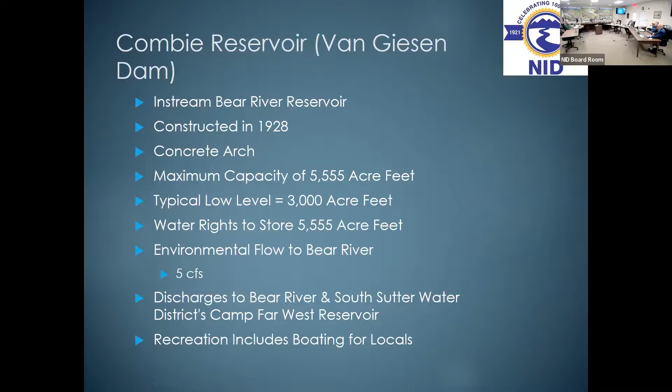And then Combie Reservoir itself provides the head pressure and diversion for the Combie North and Combie South powerhouses, as well as the Combie Phase 1 canal system, which we'll talk about at the next workshop.

For now, in this particular picture, you can see the powerhouses. Over here on the left-hand side, you'll see a dark square box - that's the Combie North powerhouse. It was reconstructed in 2010. It uses run-of-river and consumptive rights for power generation, and we have a PPA with PG&E through October 5th of 2024. This facility, however, we're not paid on standby - we're paid on actually how much we generate.

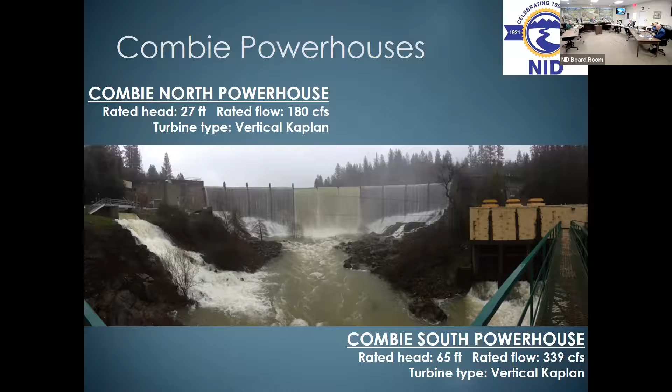That one just came back before the board just recently. And then we have three questions. Okay, let me catch up here.

From Harvey: is Grass Valley in the district or out of district? This is a question we get quite often. It's technically out of the district. There is a very old agreement by which we wholesale water to Grass Valley, and then they treat the water. We often hear that would be considered surplus water, and so NID could essentially not serve them water, which really isn't the case. When it comes to a public health and safety issue, if we decided to not serve Grass Valley or Nevada City water, we would have some state intervention. That's something we need to address at some point. The big difference between in-district and out-of-district from our perspective is fiscal - out-of-district customers do not pay property taxes, but they do pay a higher municipal rate. This is something on our list we need to address with those two cities.

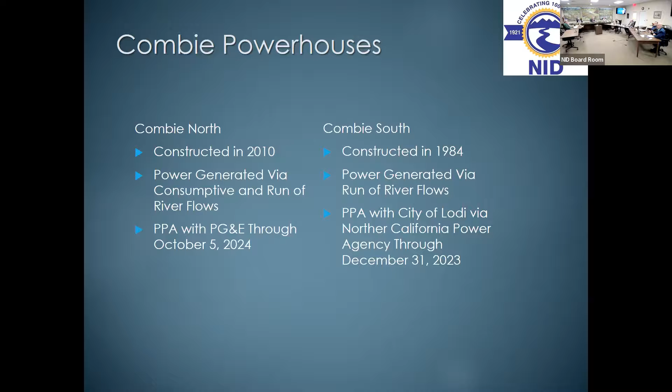And we are 15 minutes early. I feel like I talked for 4 hours. No, I think you did a wonderful job.

Just so the public understands, something special that I came to understand, and I'm sure most people can agree with, is that we have an extremely complicated system from a number of perspectives. One, it was built well over 100 years ago. There's very heavy regulations involved. We have a lot of shared facilities. So I do want to give big kudos to Chip and his team. He had a Fish and Wildlife meeting to attend, but it is an extremely heavy lift from staff's perspective to make sure we have water where we need it, when we need it. We have to make sure we're in compliance with all of our rules, regulations, and water rights, and we have to report on all of those things. And as many of our participants stated, we all care. We don't want to see anything bad happen to the watersheds, or result in something terrible happening. So we take all of that into a lot of consideration in what we do.